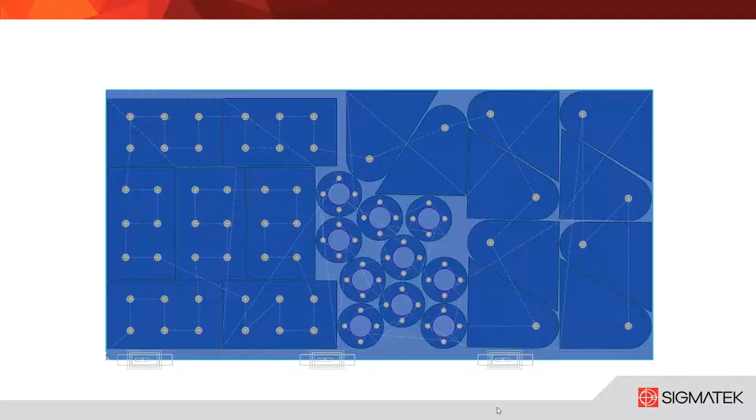You can see that I've nested parts and applied NC with a mixture of punch and laser processes. Since the machine punch zone doesn't cover the entire sheet, I know I'll need to reposition in my program. So let's go through each of the settings available to us relating to reposition. I'll start by opening up SigmaNEST here, and I'm going to go ahead and click on the reposition button up in the top of the screen here on the nesting NC tab.

Now, within the dialog box here, we can see that there are two existing positions, position 1 and position 2. If I click on each of these positions, you'll see that the colors of the parts on the nest reflect the position in which they're going to be processed. The parts that will be processed in position 1 show red, and the parts that are processed in position 2 show green. Across the top of this window, there are a number of tabs. We'll start by covering the options within the general tab.

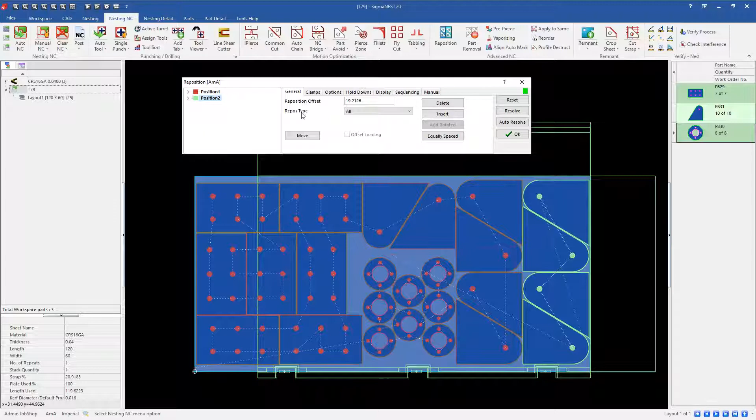Reposition offset is how far the position is from the edge of the sheet. The value for position 1 is currently grayed out because it's by default at the edge of the sheet. Clicking on position 2, we can see that that is set at 19.2126 inches from the left of the sheet. We can have some control over what processes can occur in each position, and that's done via the reposition type. The settings here are empty, all, normal punch only, punch tabs only, profile only, shear only, and crop only.

Empty positions the sheet but doesn't apply any processes. All will allow any process to be applied. Normal punch only will only allow punching to occur. So if we had a combination of punch and laser processes, like in this case, only the punch processes would be applied. Punch tabs only does tabs only. Profile only is the opposite of normal punch only and applies cutting and not punching in this case. Shear only allows only rectangular shear cutting. And finally, crop only allows crop cutting.

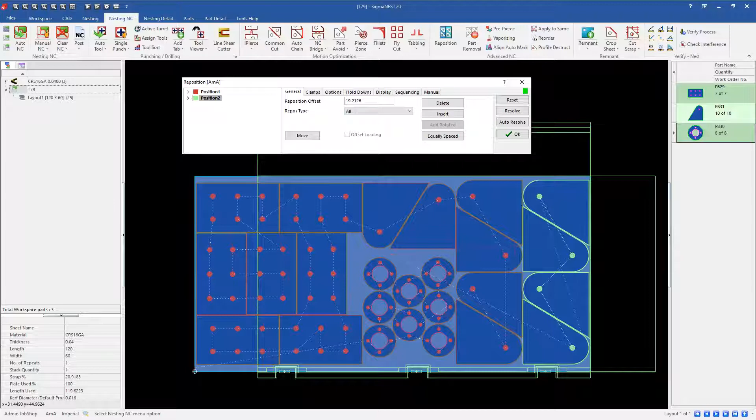For my example, I want to punch the right side of the sheet, then punch the left side of the sheet, and then apply a laser to cut anywhere on the sheet. So to do this, I'm going to change the position 1 type to empty. Then I'll set my position 2 reposition type to normal punch only. Next, I'll insert a new position by clicking the insert button here. So we get position 3.

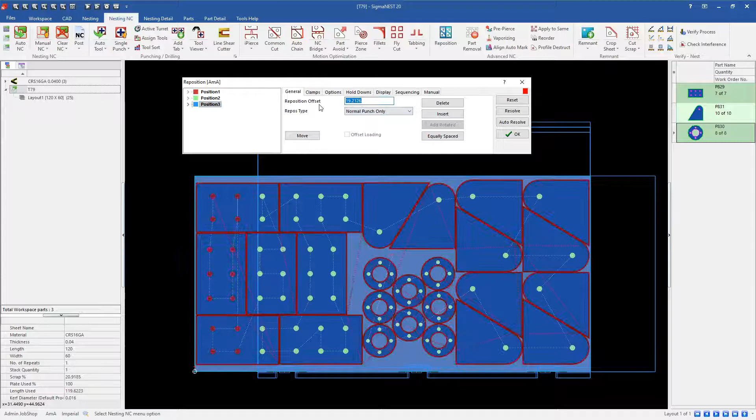I'm going to set the offset to 0 so that it goes back to the left side of the sheet. And then I'm going to set that reposition type to all. All would work in this case. If I only wanted to have laser applied in this position, I could also use profile only to do that.

The other options we have on this tab here are delete, which could be used to remove a position, add rotated, which can be used to add a position that is rotated 180 degrees, and equally spaced. Equally spaced spaces the clamps out evenly based on the last clamp position.

The next tab we'll take a look at is the clamps tab. These settings will let us adjust the location of the clamps. The clamps can be set independently for each position or once for all positions. With all positions unchecked, if I select a position from the left, I can then choose which clamp I want to adjust and set the distance from the edge of the sheet using the clamp distance here. With all positions checked, the selected clamp will be moved for every position.

The Update Workspace button will refresh the workspace and display any clamp changes. You could also use the Move button to adjust the clamp location on the workspace directly. If I select Move and then click on one of the clamps, I can drag it side to side to adjust its location.

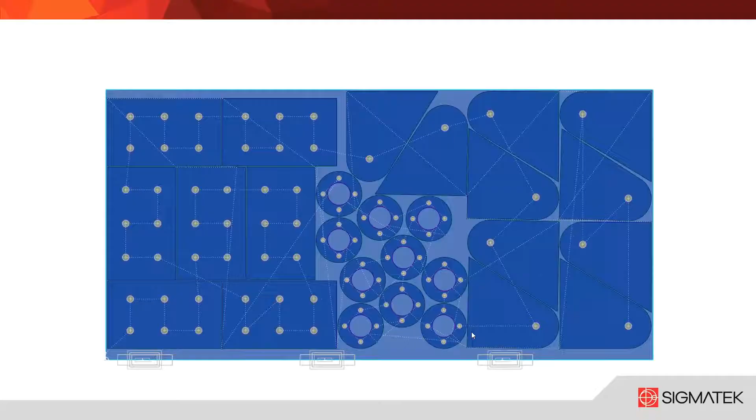If a large part is nested under a clamp and will still be under clamp after repositioning, break around clamps will cut the accessible contours, stop, reposition, and then finish the cut after the clamp has been moved. When utilizing break around clamp and crop line, the crop lead-ins and clamp lead-ins menus can be used to apply and set lead-ins and lead-outs for those cuts.

Auto resolve on move automatically resolves issues when a part is moved. If you enable force break at percent, it will consider the break percentage value when determining how far into an overlap a break occurs if a part spans repositioning zones. That is, if a part falls into two different zones or multiple zones.

On the hold downs tab, which is the next tab over, we can set the X and Y coordinates of the machine's hold downs. You can select the position on the left of the window here, and then either input the X and Y locations for that hold down, or use the move button, like with the clamp, and click on the screen and move that hold down, which is indicated right now by those two red dots and the line connecting the two of them. Clicking the Move All to Current button will move the hold downs for all locations to match the position currently selected. So each position could have its own hold down position, or they could all match.

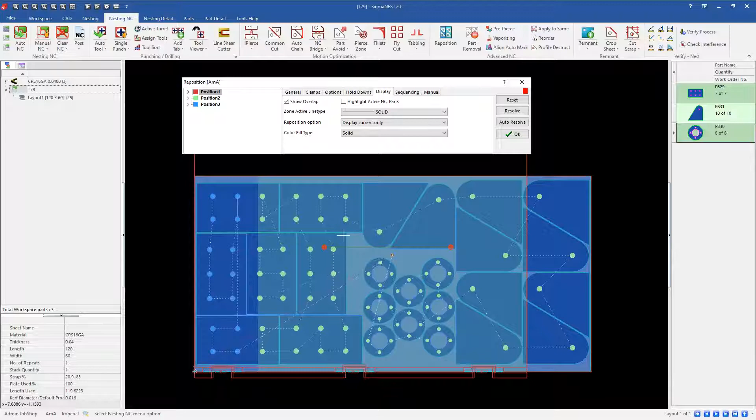Next tab over is the Display tab. And this tab can be used to configure the display of the workspace parts relative to the process positions. For example, you can adjust the line style, the fill type, and whether to highlight the overlaps in process zones. So if I were to click on that, you can see that highlighted green there, that space is overlapped by all my processes there.

Next tab over is the Sequencing tab, and this defines the break and overlap rules, reposition direction, and tab tool sequence. The part reposition break rule determines how to handle parts that fall into multiple positions. For example, the parts on the far right of my workspace here currently fall into positions 2 and 3. So just that little bit of them are in both positions.

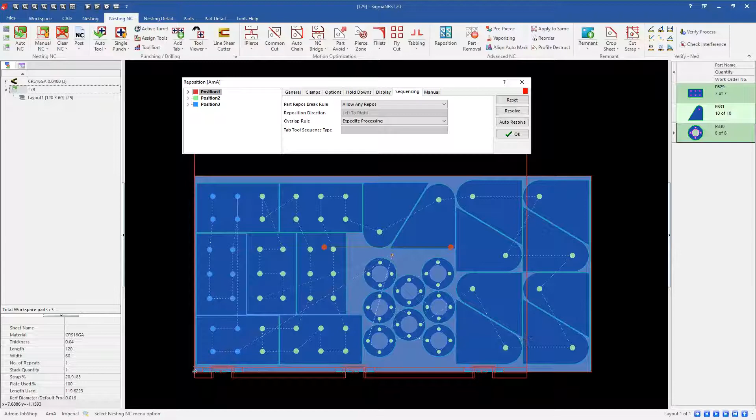Allow any reposition allows a part to be processed in different process positions. So with allow any reposition, since I have two processes happening on those parts, punch and laser, it's allowing them to be processed in each of those zones separately. If I have keep same repos if possible, that sets a part to have all processes applied in just one of the overlapping positions if possible. So it tries to process all of the part in one position.

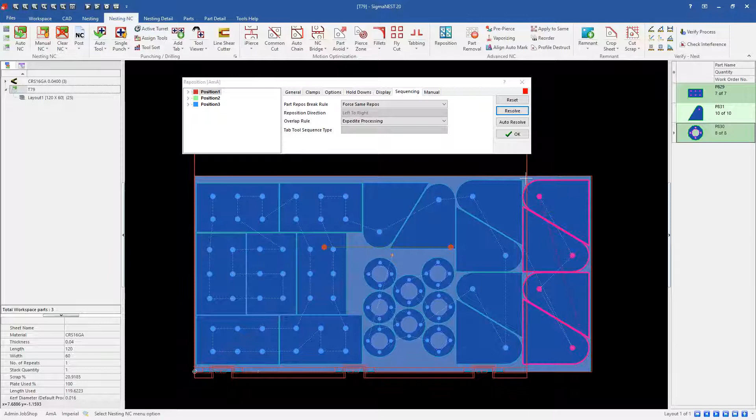And force same repos forces all of the processes to be applied in the same position. For this to happen, the part must fall completely within one position. So for our example, if I set this to force same reposition and click resolve, you'll see the parts on the right start blinking, letting us know something isn't set up correctly. I set my position so that the punching is happening in position 2, but the laser can't happen until position 3. So force same repos is trying to force both to happen within the same position, but it can't. If I set this back to allow any repositions or keep same repositions if possible and resolve again, now it goes back to being fine.

The overlap rule and this reposition direction, that's actually set within the post, so that's not something we can change right here. Overlap rule, this is used for parts that are nested within overlapping process zones and require processing before any repositioning takes place. So our options here: expedite processing allows parts to be processed in the first available position that overlaps all of the processes. Delay processing allows the part to be processed in the last process position that the part is nested in. Delay only forming delays the forming process to the last possible overlapped position. And finally, max delay allows parts to be processed in the last position that overlaps all of the process parts.

So again, this is just talking about when you have multiple processes set up for a part and you have overlapping zones, how is that all handled?

And then the tab tool sequence type, that's used to select how tabbing is applied. The tabbing can be applied as the processes occur or delayed until after the position processes to prevent tabs from separating during repositioning. This option must be enabled in the post file, otherwise it'll be unavailable, like in this case here. The options here would be: 1, allow tabbing to occur within the reposition process with all the other tools. 2, apply tabs after the reposition process is completed, working from the last position back to the first position. Or 3, after processes are applied to all positions, the machine is positioned back to the first position and then tabbing is applied.

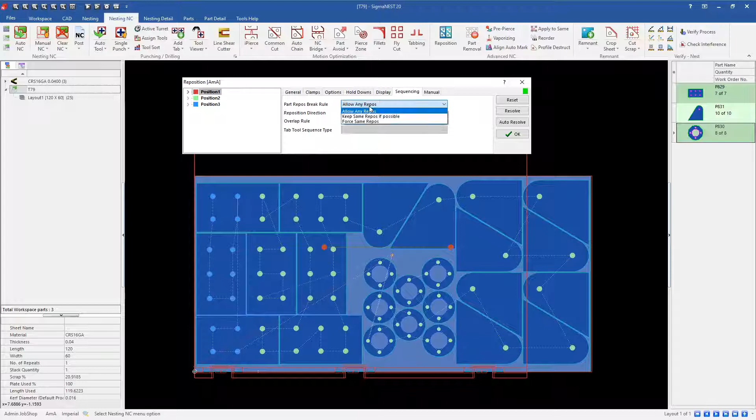So as an example here, if I go back to my Sequence tab and change this to Force Same Repositions, and I get my error again, I can come back to the Manual tab and select Position 3, select the Select To Change button, and then pick those parts that are giving an error. So I'm overriding that Force Same Repositions and moved those parts into position 3.

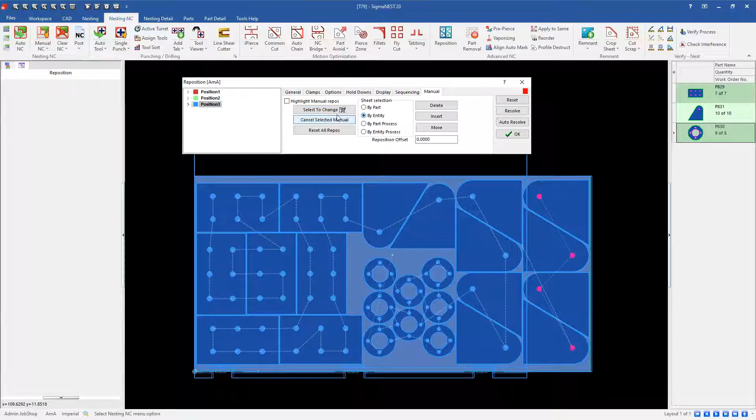Now, because it's trying to position all of those parts in position 3, but the punch that's outside the punch zone, what I'll now do is go to By Entity, grab those punch contours there, and move those back to position 2.

So what I did here was I tried to force same reposition. I couldn't position these all within the same position. So then I manually added the parts to position 3 and then went back by entity and just did those punch contours and put them back into position 2. If you need to reset the repositioning back to the original, you can just click the Reset All Repositions button there.

Finally, we have the Resolve and Auto Resolve buttons. If you've added any manual repositions, Resolve will apply the processes and settings within that position. Auto Resolve will automatically set up all of the repositioning. And that takes us all the way through all the settings for reposition.